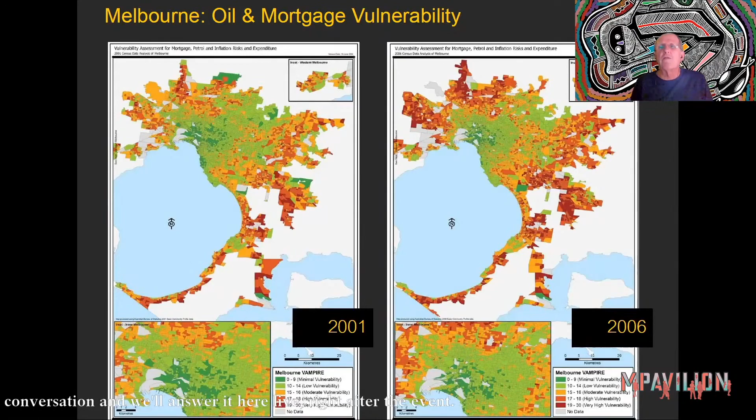We've asked, how well are we using the stuff that we already have? When they looked at the facilities they had, they realized things like lecture theatres were only being used for 17.5% of the time.

At that stage, there were about 4,000 students on the campus. I went back 30 years later and they'd trebled the number of students. The only thing I noticed is there hadn't been much building, but the vitality of the university had moved ahead in leaps and bounds. There were lots of people, it was concentrated, there was an energy, and it was an exciting place to be and visit. I asked myself, if you can do that for a university, why can't you do it for a city?

Coming back to Melbourne, Melbourne was going to move from 5 million to 10 million people by 2050. If you applied those same principles we saw at Cape Town to the city, and we did a fairly thorough study, the result was quite startling.

We could accommodate the next 5 million in Melbourne on 7.5% of the city, hence the title, the 7.5 city. We would do this by building around the existing railway centres, known as activity centres, along road-based public transport, both tram and bus, and in the greyfield sites. We'd build around our existing infrastructure, no higher than 5 to 8 stories, to produce good public environments with quality streets.

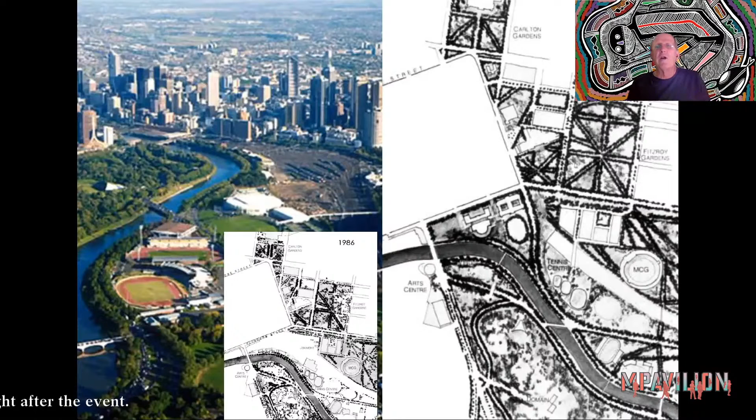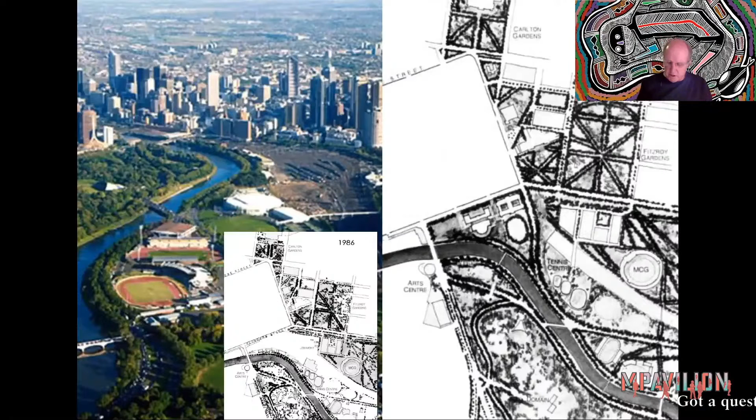We managed to do that with Federation Square and a premier at the time, Jeff Kennett, who said, if I take away the railway lines, you pay for and design the park. And that's what we did. What you see here is Birrarung Marr, an 8-hectare park that now connects the river back to the city. That was part of that adaptation.

So as I talk to you this afternoon, we've got 10 new parks being created through our city by taking away roads and converting them to parks. This is happening at a far more rapid rate than it had happened before in our city, and it's bringing people back into the city to work, live, and enjoy the city.

The biggest adaptation we did was bringing back a population to Melbourne. In the 1980s, we took our population downtown from 680 units to over 40,000 units. That is the biggest adaptation Melbourne has had.

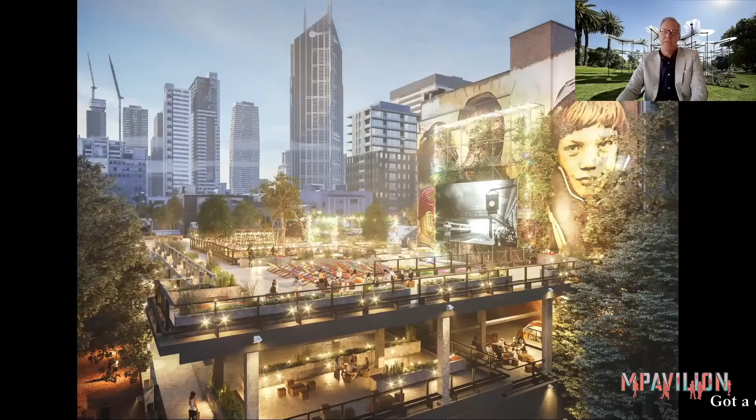We've looked in detail at some 3 sites across central Melbourne. The first one here is on Hardware Lane, and we were very interested in creating a vertical, publicly accessible urban space and delivering rooftop space for cinemas and bars. Throughout the remainder of the building, we came up with the idea that we could retain the existing car park ramps and provide flexible working environments, working pods or working studios, along with vertical landscaping through this building.

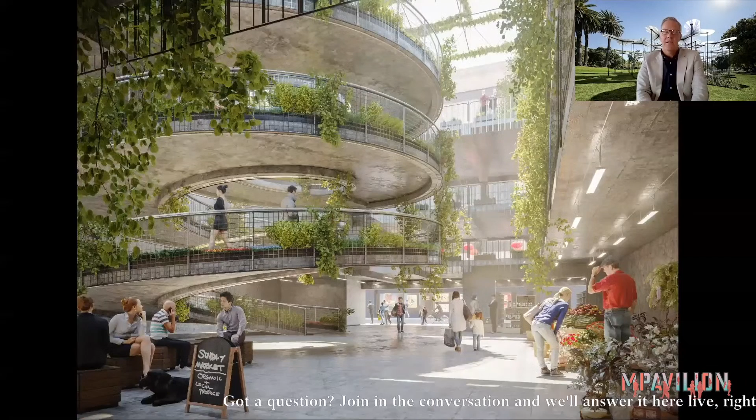One of our other sites here on Little Lonsdale Street is in the northeastern corner of the city. It's in a part of Melbourne known for its markets and food stores, and we liked that concept - thought we could carry this idea of a market through the ground floor, deliver a ramp which connects up to the rooftop, heavily planted. Essentially this is a calming and restorative space in the centre of Melbourne, providing publicly accessible open space for people to use and enjoy throughout the day.

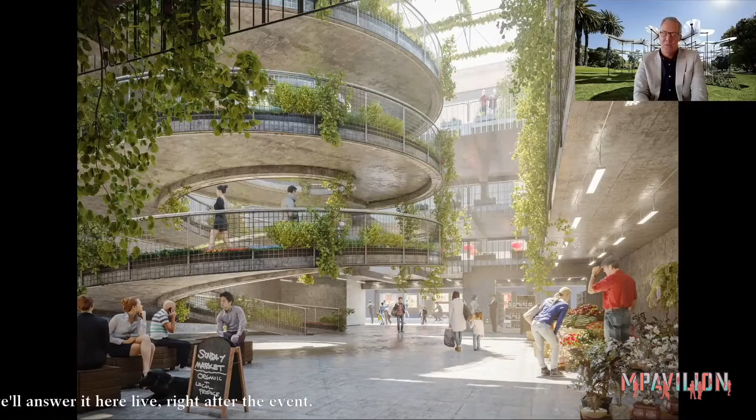There's opportunities for tennis courts, and then throughout the remainder of the building, opportunities for introductions of gyms and other passive and active recreation facilities within this building.

So this concept of refurbishing, retaining as much of the existing structure as possible, and therefore delivering significant space for community use and activities, which we think is much more sustainable than demolishing these buildings and starting again.

We've also started to look at, well, actually, the sketch shown here - social and affordable housing as a potential use of these car park sites. So we don't think necessarily that this proposition needs to be solely about refurbishment, but we also think there's an opportunity for development of these sites as social and affordable housing.

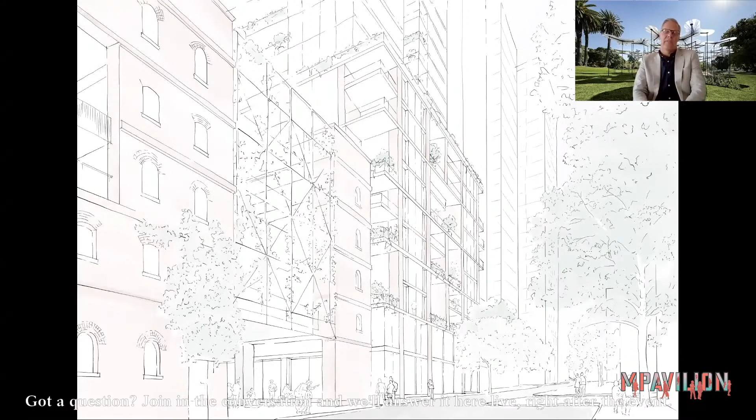So in all of this, the idea is that when the owner of these car park sites sells the land as exchangeable floor area, the site actually gets handed back to the City of Melbourne, with a portion of the proceeds of the sale given to the City of Melbourne to allow for the refurbishment and adaptation of these car park sites.

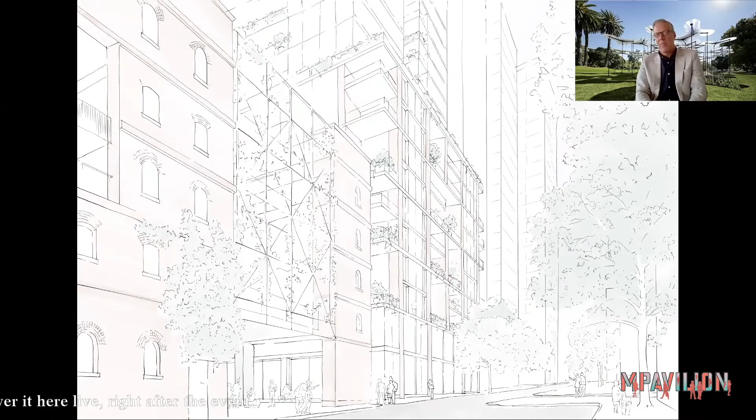So we're very excited about this project. It's really founded in this idea that we're interested in creating cities that are more human focused, that are very interested in what the future of our cities is about and how we might contribute to a greater sense of community, embracing neighbourhood, urban areas and public spaces. And we think people need to be at the centre of this.

Thank you. And over to Alessandra.

Yes, thanks a lot for the invitation. It's a pleasure to be with you again. So I've decided to focus on some of my work and keep it brief.

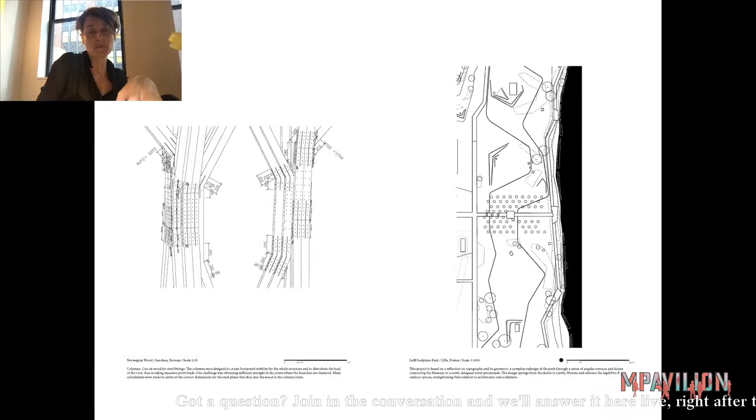I think the most relevant example of the work that we've been doing throughout the years is in between - building strategies at large scale, framework planning or master planning, and also building core, from small scale installations to very big, several hectares, large plans. Really, it's the multiplicity of scales and also interdisciplinarity of the scales and disciplines that we've been dealing with that characterizes our work, with a particular emphasis on the public realm, on smart cities.

One of a series of themes that we're particularly interested in is this idea of retrofitting, building with what exists. One good example relevant to the topic today is the work we did for the Central Business District in Paris, La Défense, as a result of winning a competition, where we delivered the first master plan, focusing on mobility spaces, public realm, and infrastructural spaces.

La Défense, as you may know, is one of the biggest decks of slab in Europe. It's a 160 hectare site with 30 hectares of deck, of slab, meaning that the 6 levels underneath, mostly occupied by car parkings, greatly underused - I must say, because the public transportation works really well - and other infrastructures.

So we were asked to do a plan to enliven, to modernize, to make this site attractive again, having it lost attractiveness. So here you can see an aerial view of La Défense, this idea of modernity that was post-war modernity, largely inspired by North America.

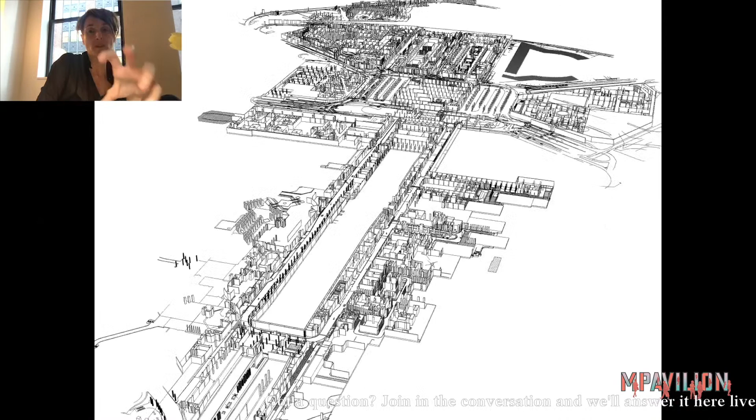And this idea of the ambiguity of the ground and the space of the car. So this is the first level underneath. There are 6 levels like this under La Défense, and you may recognize it's Le Plan Voisin by Le Corbusier, which was done several decades before La Défense, bringing some of this idea in place, advocating for this separation of flows - pedestrian flows and car flows.

La Défense, before the work with the CNIT, the exhibition center, was one of the first buildings to be built, in '58. And what it looks like now is quite generic, with several of these pedestrian bridges connecting the center, which is carless - the cars are underneath - and the surroundings.

That's one of the 6 levels of parking sites underneath, and that's the vision that we did, which is also in the monographic issue of Architecture d'aujourd'hui.

I like this quote by Edwin Heathcote, which talks about the embrace of complexity. A project like this, and every project in a contemporary city, calls for embracing complexity, calls for dealing and building with what is already there, retrofitting what is already there, appropriating it, making it sustainable for the future, and also bringing a new forward-looking idea of what public space should be, what's a space that can congregate, can go for a new public to come.

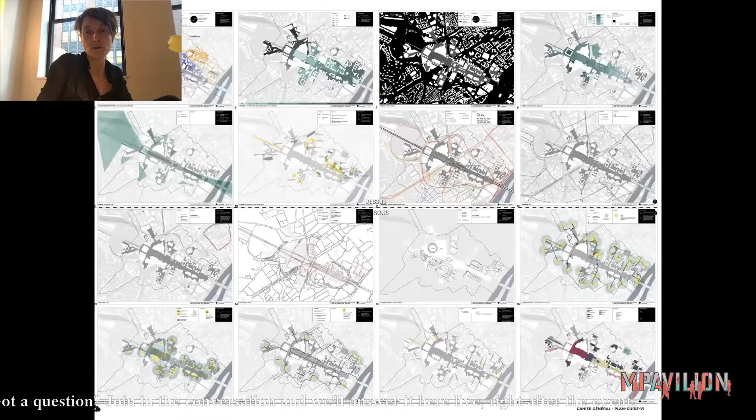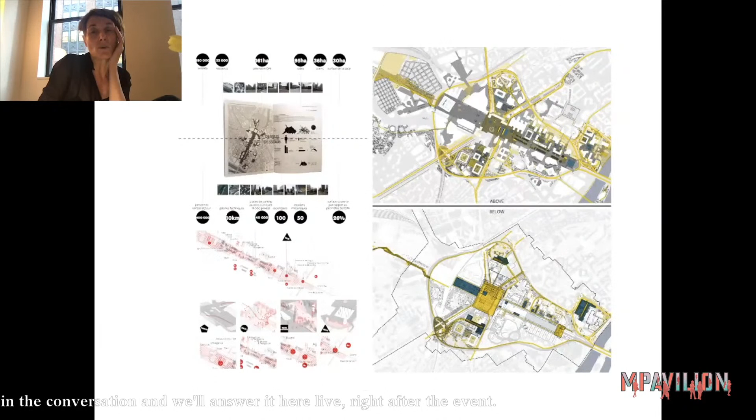Going back to La Défense, we first looked in a very traditional way at the above and below, and then came with the plan, a sort of acupuncture plan, proposing a series of interventions. One of the biggest is a huge public space and the retrofitting of the existing parking space. Here you can see, on a time frame of about 10 years, in black, the different interventions above and below.

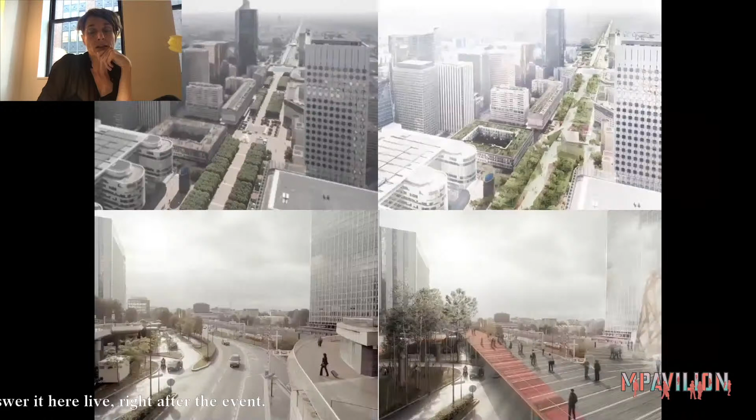And of course, the public realm above, which is free of cars, devoid of cars, is in need of an upgrade in design. In these two images you can see the proposal for the retrofitting of the parking space. On the left is the existing condition, and on the right what we propose, which is basically really like acupuncture and retrofitting, opening up the site to allow natural light to get in, working with light, working with plants, with nature, also like in real nature, but also artificial nature.

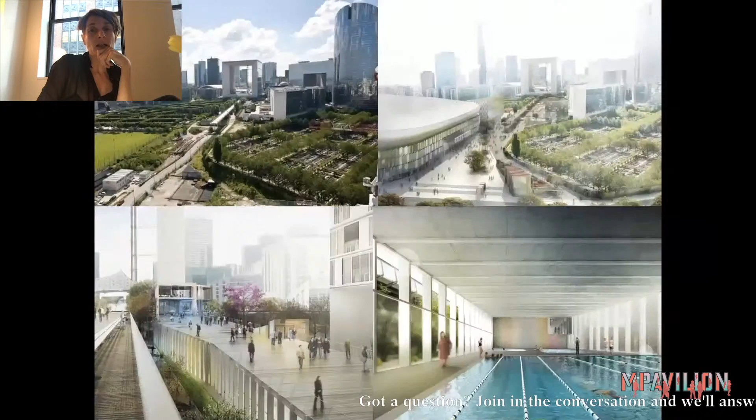And bringing retail. These are some other interventions, where you can see again this ambiguity between above and below, and the fact that car parks can also work this way. This new ramp that we designed, linking La Grande Arche to Nanterre, is a public space above, and then below it has parking spaces, but also gym spaces, swimming pool, art galleries, and all sorts of things. So it's advocating this mixity.

And very briefly, I will go to the design thing that we did mostly at the same time as we were developing the master plan, on this site of 7,000 square meters. It's also infrastructure, so we're still on the deck. There are still 6 levels underneath, with a highway and with heating stations.

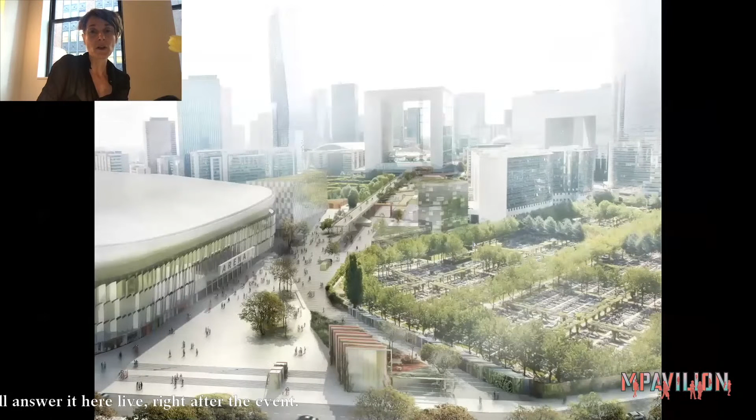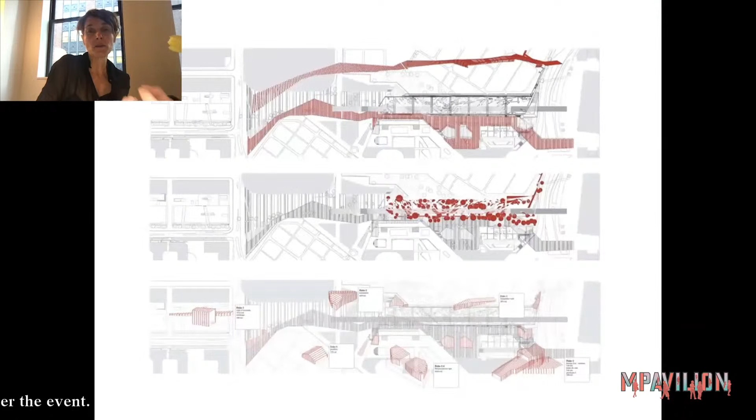So far, this was an initial image with the new arena by Christian de Portzamparc. And the principle is this: to have this infrastructural ramp with a slope of 4%, including a series of follies above and beneath, including car parking areas and sport facilities, and also cafes and restaurants.

And that's what it is as built. As you can see, all the infrastructure elements, like this red element here, which brings ventilation down to the parking and to the infrastructures on the 6th level below, are transformed into something playful. This is like a climbing wall, some others are skateboard parks and so forth.

I don't know how much time we have for another project in Liverpool, but you're telling me if I can stop here. Yeah, I might.